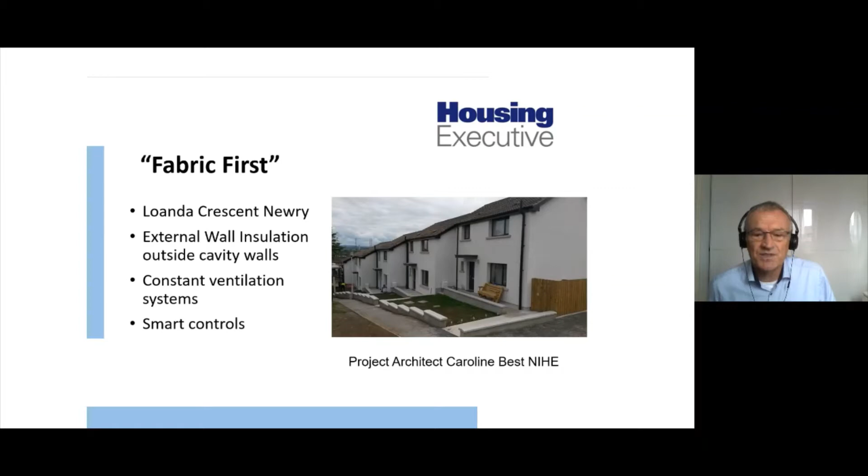This is a scheme in Northern Ireland where external insulation was applied, and unlike the Green Deal, we put in ventilation systems, and we're investigating smart controls for that. The architect for that was our Caroline Best in the Housing Executive.

The kind of things we're looking at the minute, we're reviewing our energy strategy at the same time as the Northern Ireland government is reviewing its energy strategy. The kind of things we're thinking of is insulation first. It always works. It works for a long time. It's also compatible with installing heat pumps perhaps later after electricity tariffs have been reformed. We've got a lot of issues with oil systems. We've got oil spillage. People spill oil as they're trying to pour little tanks of oil into their oil tank, and remediation for that costs tens of thousands of pounds every year. So we're interested in alternatives to that.

And again, if we're going to decarbonise a lot of rural properties, the issue of the grid comes into play. We've got a stringy, long, extended electricity grid, so we don't necessarily want to add a lot of loads to the extremities. So we were thinking of perhaps insulating those houses first. And because we have so many existing houses, I think all of our houses have hot water cylinders. So we're thinking, can we provide some of that hot water using decarbonised electricity, perhaps wind energy?

And in our estates, typically, perhaps half of our houses may be sold houses. So we're interested in solutions that might come in via regulated community utilities, perhaps for community heating, a bit like gas or a bit like water.

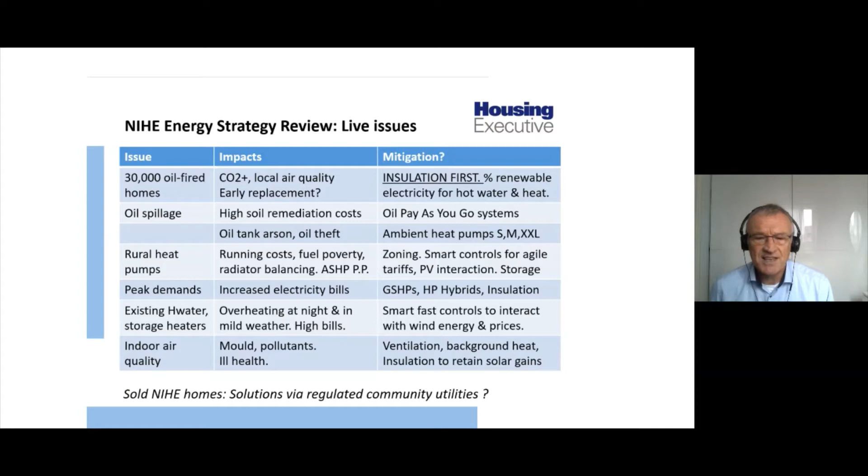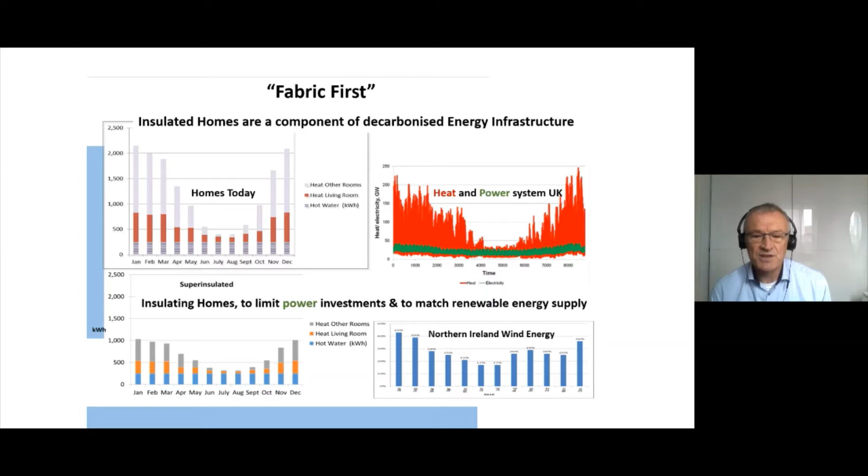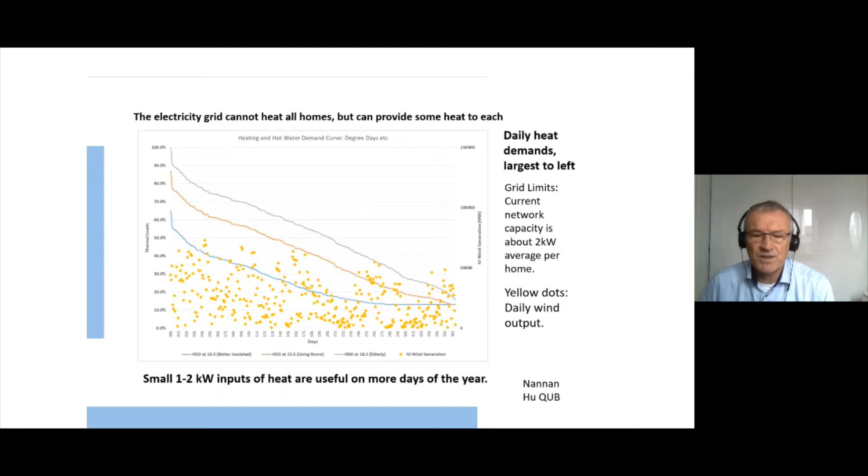Again, if we look at the wind energy resource and heating demands, this little graph here has the days you need most heat on the left, and the days you need least heat on the right, and the bit below the lines is where you need hot water, and the little dots are wind energy. So we're thinking how much of those hot water demands, of those heating demands, can be met with wind energy.

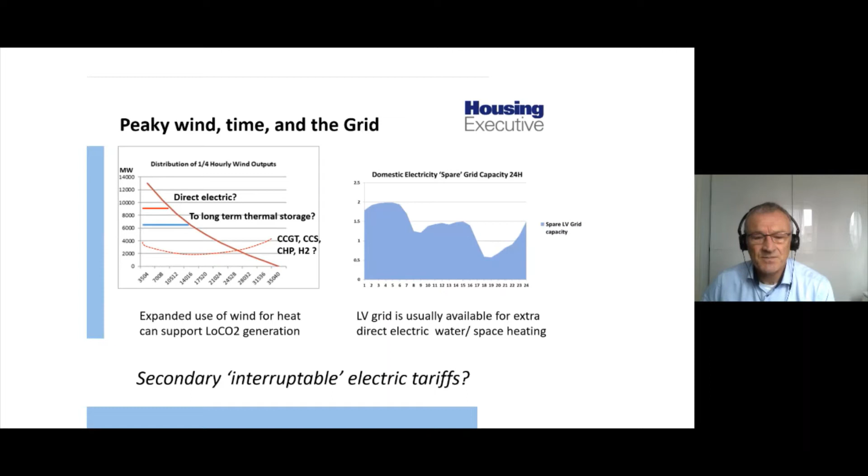And again, we're upgrading the grid. We'll be upgrading the grid for EVs and heat pumps, but every time we upgrade the grid, we expect it to last about 30 years, and there's going to be space in that grid which could be used by direct resistance heating for heating hot water or for things like that. So it could be underused for years.

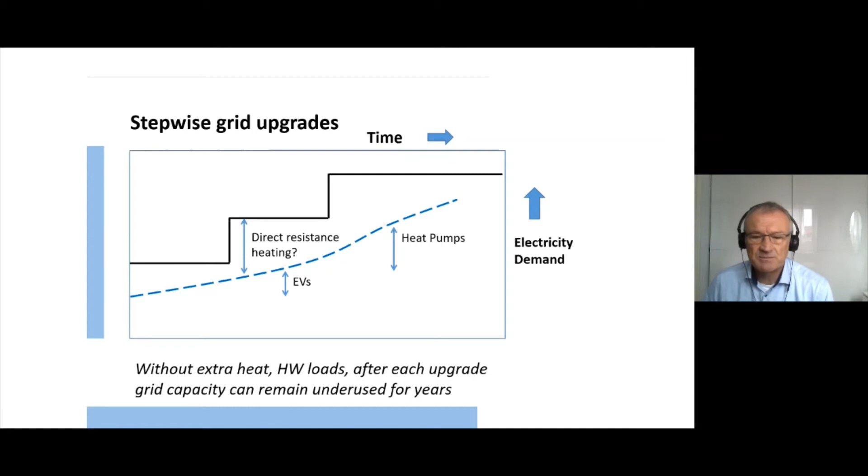And whenever we look at carbon emissions, why are we interested in this? To decarbonize houses, if we can perhaps provide a percentage of the annual hot water load, the heating load, using perhaps renewable electricity, we can kind of decarbonize our 85,000 houses. We can start with that rather quickly.

But also the ones with the very low emissions are at the bottom. You can look at these slides later to get the detail. But the things that have very low emissions are things like community heat systems that have very big heat pumps, as they're doing in Glasgow, and some kind of thermal storage. And some of those things can be externally financed and also available to private owners and landlords.

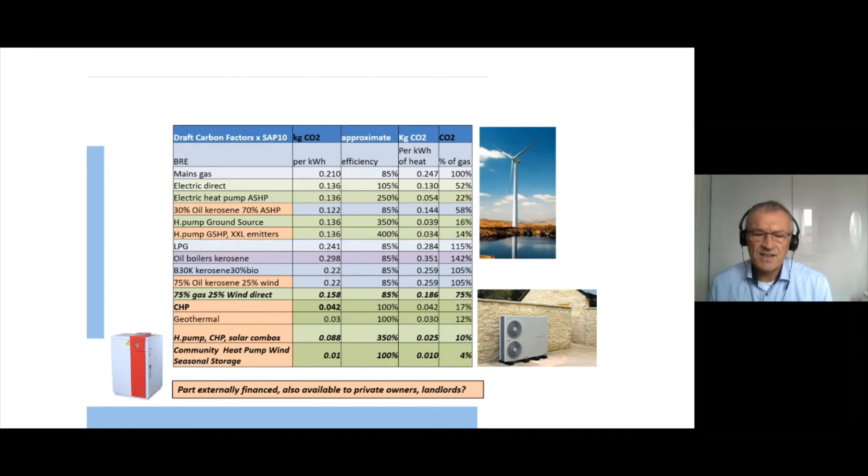Next slide. And again, because we have very little money, we're interested in what can be part funded, things like PV, and perhaps getting paid by electricity grid operators for changing systems. And again, microgrids could be a possibility, but that's kind of on a case-by-case basis. We're interested in something that would enable people to pay for oil bit by bit, so perhaps they were less inclined to get little oil tanks and spill the oil.

And again, to inform the case for external investment, we need better data. We need data on temperatures when people are using heat, and also humidity, because it can lead to damp and mold in houses, and we really don't want that. Next slide, please.

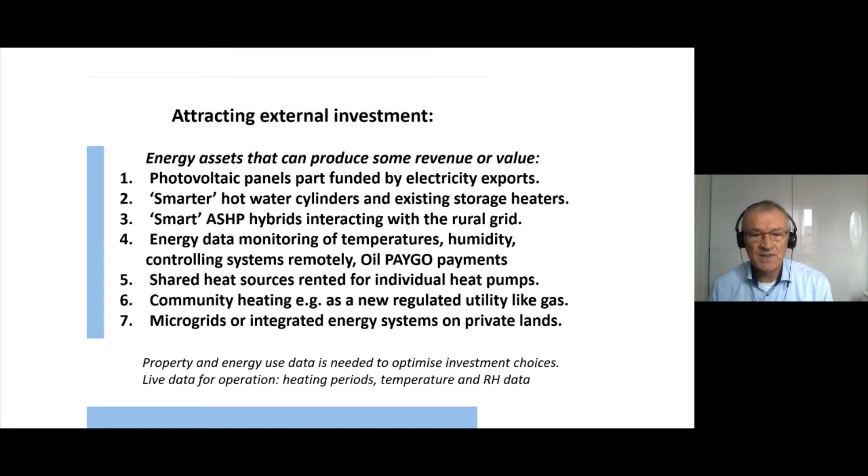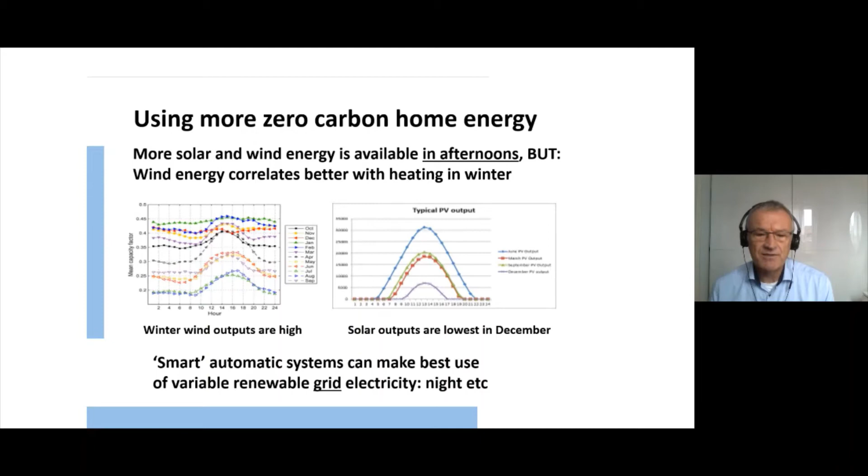Wind and solar energy. Solar energy and batteries are kind of oversold in our view to an extent, because in the depth of winter, there's very little sunshine about. But actually, winter wind outputs are quite high. Both renewable energy systems have quite a lot of energy available in the afternoons, which is good for social housing. We've got more people at home. But for example, if the wind blows at night, we need smart automatic controls to make better use of variable grid electricity. So we need those smart systems.

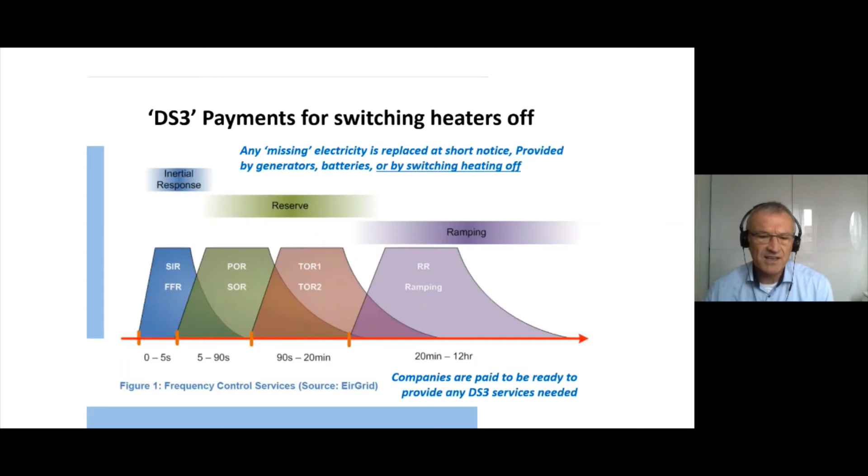Next slide. And again, this is a slide from the electricity grid operator. Next slide. They can switch things on and off to regulate the grid. So we've got wind energy, we can store it in hot water cylinders. We can also provide ordinary gas radiators or oil central heating radiators with an electric element, so we can switch between the two.

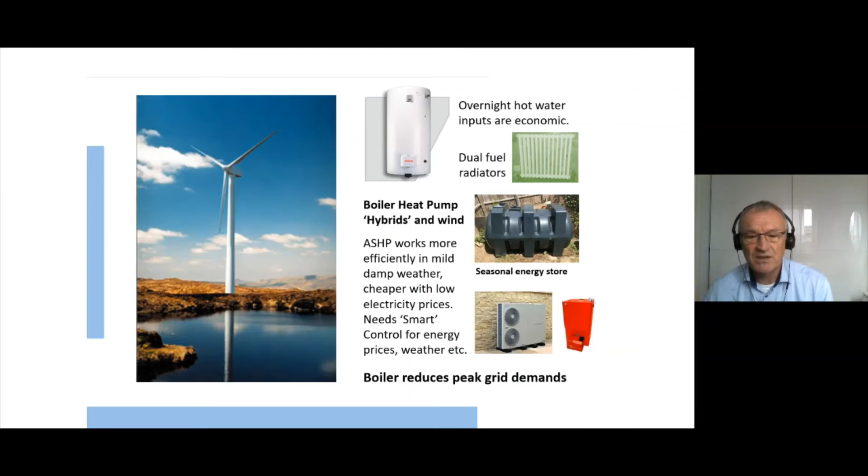But these oil tanks in Northern Ireland, you can look at them as a seasonal energy store. There's as much thermal energy in those as say 100 Teslas or 200 Nissan Leafs. So we're interested in perhaps slowing down the rate at which we use that heating oil. And to interact with wind energy in the grid, hybrids are quite a promising solution to deal with peak grid demands. We just switch the boiler on. Next slide.

Shared heat sources, again, an interesting system because we've got difficulties putting air source heat pumps in terms of planning permission, that kind of thing. So these systems are interesting to us. We've got a lot of water in Northern Ireland, a lot of lakes, a lot of groundwater, so we can perhaps use those systems. The pipes in the ground can be plastic, so that can be more economic to distribute around, for example, suburban areas.

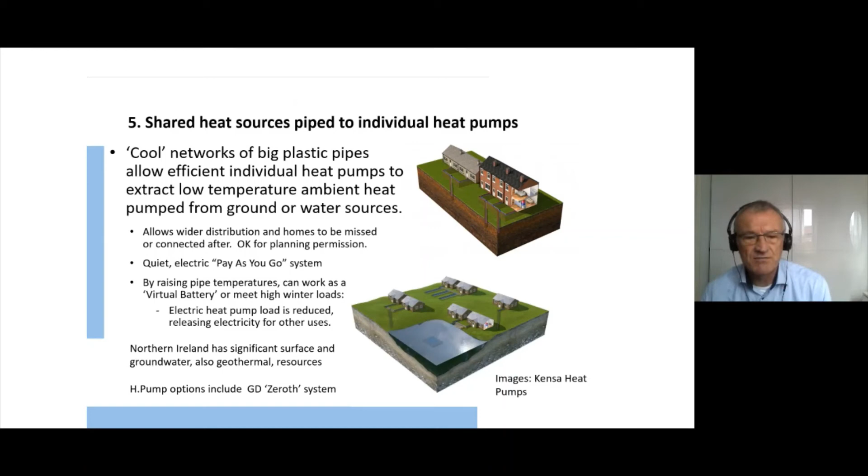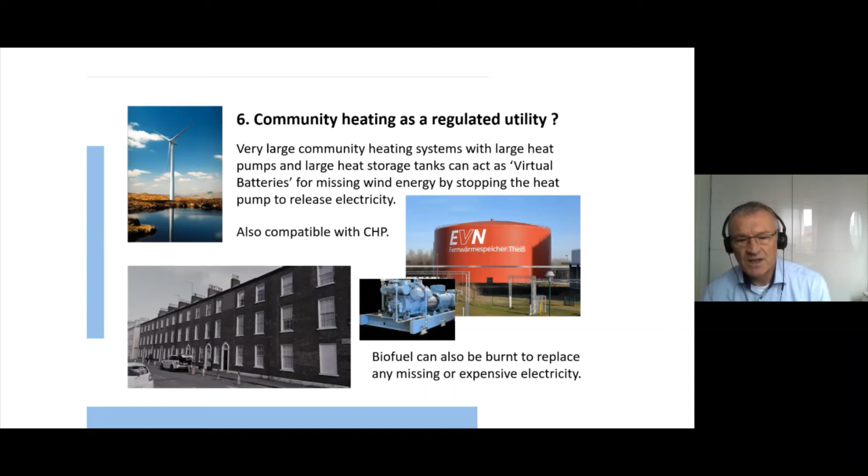Next slide. Systems for cities, we think there's potential to use those, especially in historic areas where it's going to be difficult to insulate those houses. We're also probably going to get resistance from private landlords to spending a lot on insulation, and there's the disruption. So we think community heating, ideally as a regulated utility to lower the cost of finance, has a lot of potential. Next slide. And in Austria, they've gone for it big time, where they just build heat reservoirs. Next slide.

Data has a huge potential to inform what we do in terms of future heating systems. For example, what tolerance do people already have for varying temperatures? When do they put their heat on? Because that's going to show the potential for, for example, preheating houses with renewable electricity directly as it's available, and then perhaps that will suppress people's activation of fossil fuel systems. How much heat that's provided to houses is actually for drying, because if it's for drying, it can be provided perhaps at night or at different times to coincide with the availability of renewable electricity.

And how much value can be added by directing heat to exactly the rooms where it's needed. People want more heat in living rooms. We did a trial of zone control, and we found that people were only heating the upstairs perhaps 20% of the time. And again, getting that data off-site enables you to control the systems to make better use of electricity, but also you can analyze that data to inform, for example, health investment. Next slide.

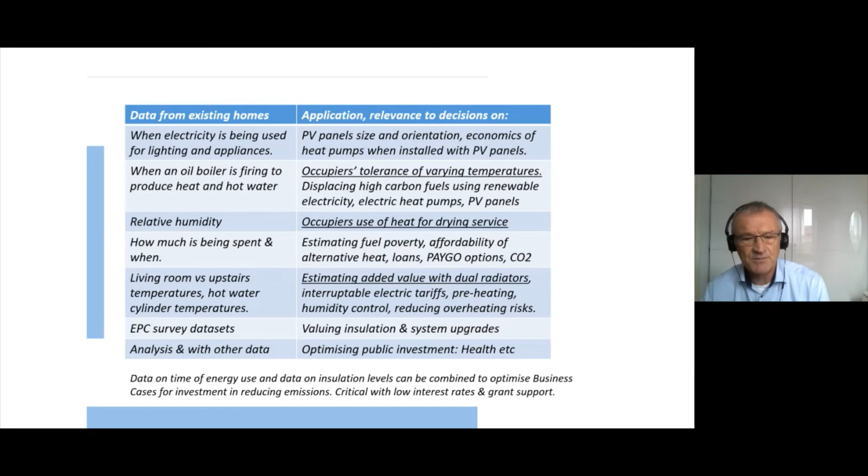So in an insulated house, energy that you put in early is still worth something. It preheats the house, it makes it feel warmer. Our houses are usually heavyweight blockwork, which is quite a lot of heat retention capacity. So that's something that's of interest to us, and that's certainly what will be done with a heat pump anyway. You don't want to be switching a heat pump on and off. So if you like, we'd like to get people used to the idea of accepting energy at times other than the normal off-on heating periods. And again, we need better thermostats to know what the temperature is in the house, to know when preheating is worthwhile. Next slide.

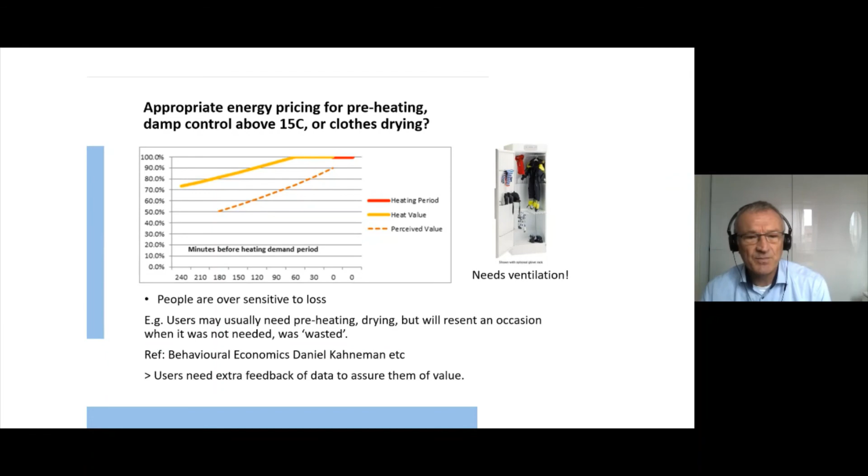Yes, so the energy service of the future, we think there's a big role for data, because if you're using renewable electricity in almost an uncontrolled way, you want to reassure people that they've been delivered something. So you'll need to be able to tell them afterwards what was delivered, how much drier their house was, how much warmer their house was, how much the energy cost. So in terms of developing an energy service for the future, it needs the data to be off-site, and it needs that feedback. And again, people will need to agree to share that data. So data feedback has huge potential in that.